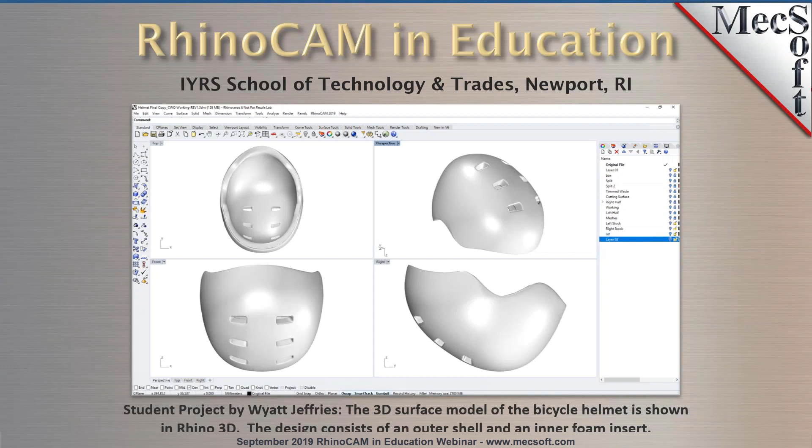So let me ask you, what was his reaction to RhinoCAM while making this project? The students are always blown away by what they can do with RhinoCAM. We start with RhinoCAD, so they actually have to design everything on their own. Then they go into RhinoCAM and I work with them one-on-one. The fact that they can take—this mold in particular was a split mold—just that concept alone is amazing. But being able to have RhinoCAM put in parting lines and indexing points for them, simple things like that are huge for our students.

Cool, tell us about this project—I think this one's pretty cool. This is actually one of my favorite projects. This was when I had first started taking over the RhinoCAM section of our course. This is a student's, we call it a suicide knob, for his steering wheel. Actually, we pushed this student to patent his idea because it was so unique.

This was actually a challenge, getting the correct radius in on a 3-axis machine, plus getting all these minute details because it was very thin. And the part was made out of carbon fiber as well. So we primarily use RhinoCAM to make all of our plugs and molds once they get to a certain point.

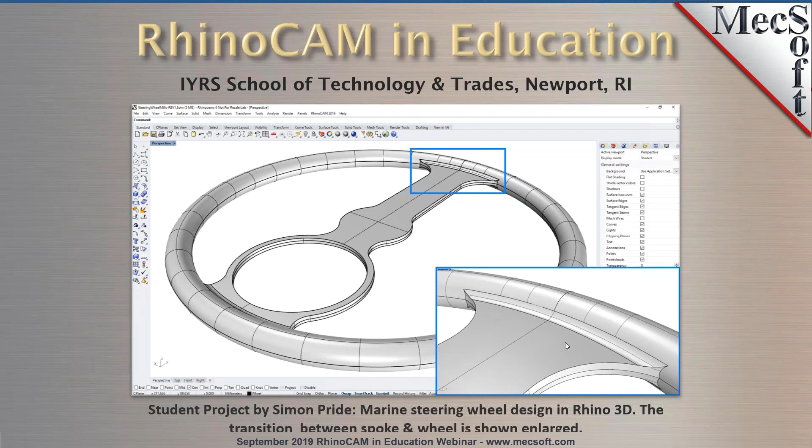We're highlighting the intersection there between the spoke and the wheel, the filleting, and how the parting lines had to work out there. Yeah, a lot of detail went into that.

We have 4 programs here, and one of them is a boat building and restoration program. It's a program where you learn how to build a boat and then learn how to restore a boat. A lot of our students are fortunate enough to get jobs at the Mystic Seaport. This particular group had worked on the Mayflower too.

We also have another restoration program project going on campus, which is the Coronet, another huge historical boat. The whole entire crew as of right now are all former IYRS students.

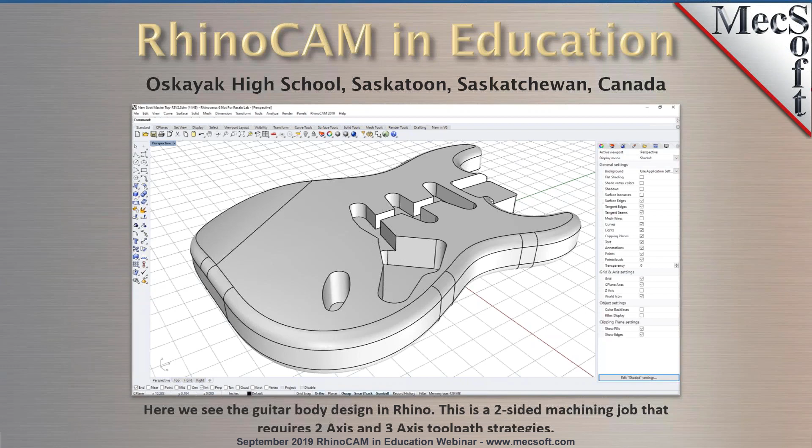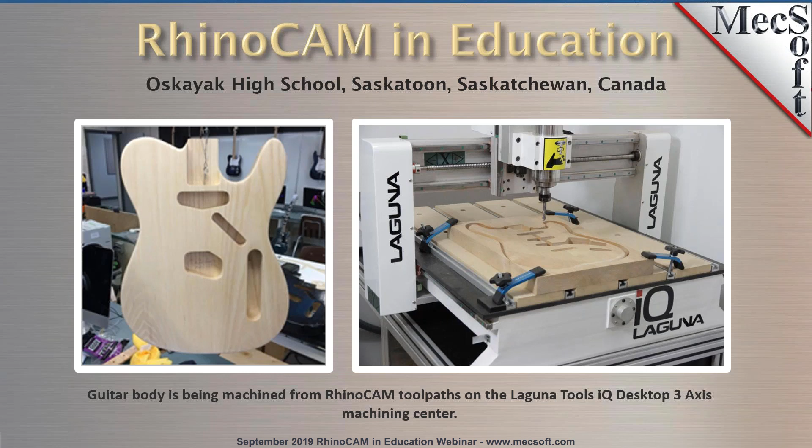Now what we're going to do is show you the RhinoCAM projects associated with these actual student projects. We're going to show you the RhinoCAM files, so let's go ahead and do that right now.

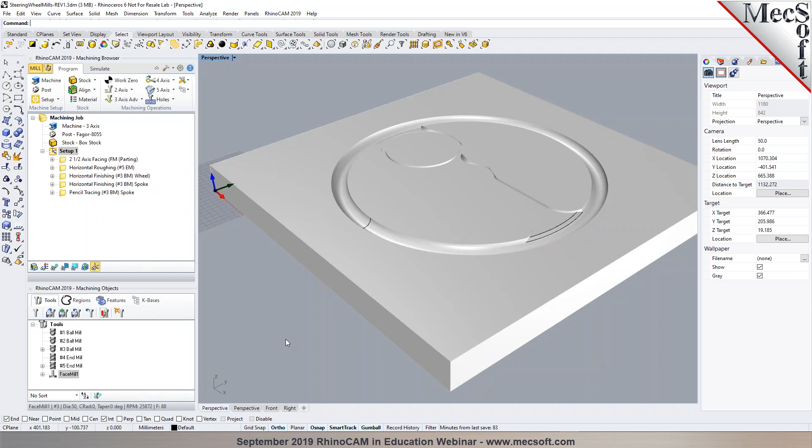This file is Simon's steering wheel composite mold. We're just showing one half of the mold, and we're going to show you a little bit of what the toolpaths were used to create this mold. In setup one, we have one half of the mold. Let's show the toolpaths real quick here.

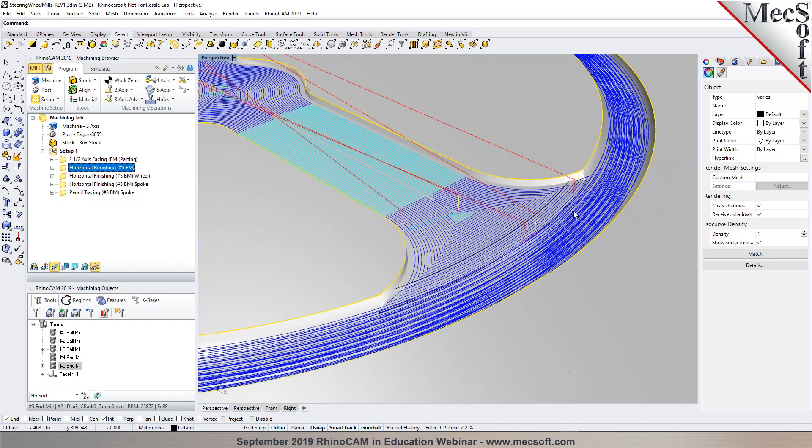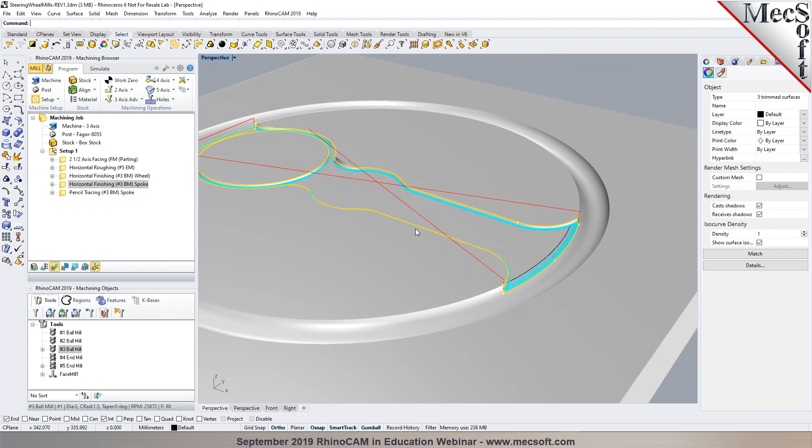We have a facing toolpath to face down the top of the mold. We have our roughing operation, which clears out the steering wheel itself and also the spoke area. We have one of our finishing operations to clear out the actual steering wheel, and another finishing operation to clean up the area where it meets the steering wheel and these sections of the spoke area. Then we finish up with a pencil tracing operation.

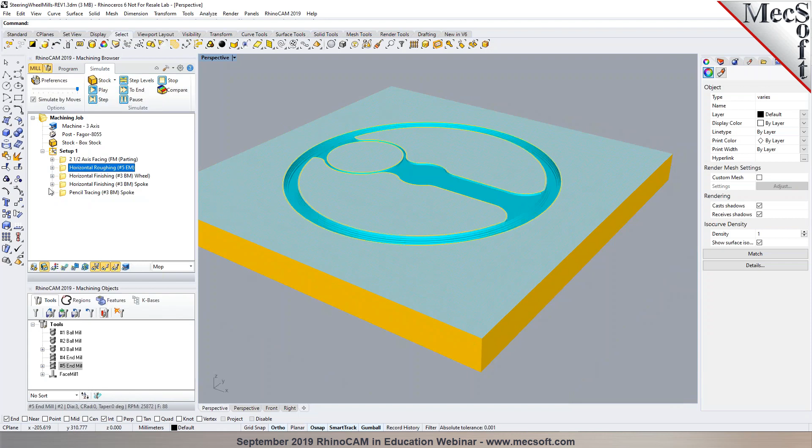Let's show some cut material simulations real quick of these. We won't run the simulations, we'll just show you what they look like and step through them. So we've got our facing - we'll turn the toolpaths off - then our roughing, our first finishing operation, our second finishing operation, and then our pencil tracing. Okay, let's go over to our next project from Wyatt Jeffrey.

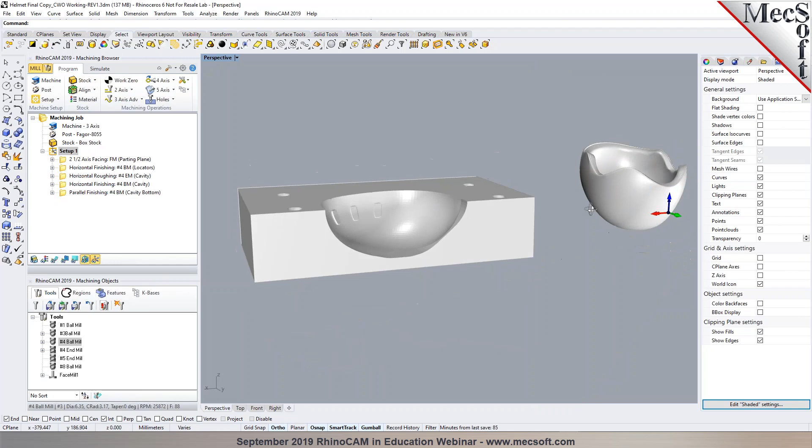As you can see here, this is the bicycle helmet that Wyatt used initially to create these layup molds. We're just showing one half of the mold, so it's basically mirrored on both sides - there are two mirrored halves of this mold.

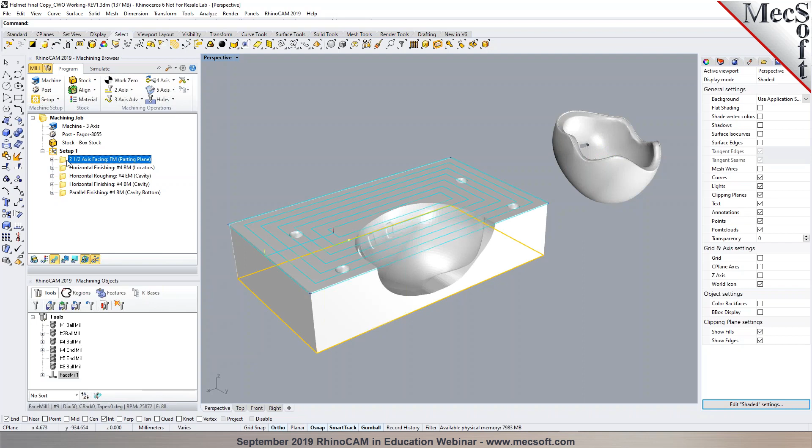We'll go through the toolpaths and then show the material simulations like we did on the other project. We start with the facing, then we have our four locator pins, then our roughing operation, also a horizontal finishing operation and a parallel finishing.

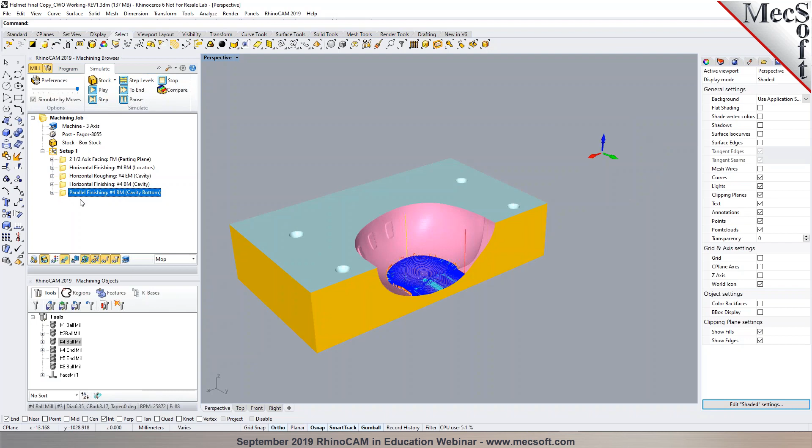Let's go ahead and show the cut material simulation of those real quick. So we start with our mold half, turn the toolpaths off so you can see them better. We've got our facing, our locator pins, our roughing operation, and then our finishing.

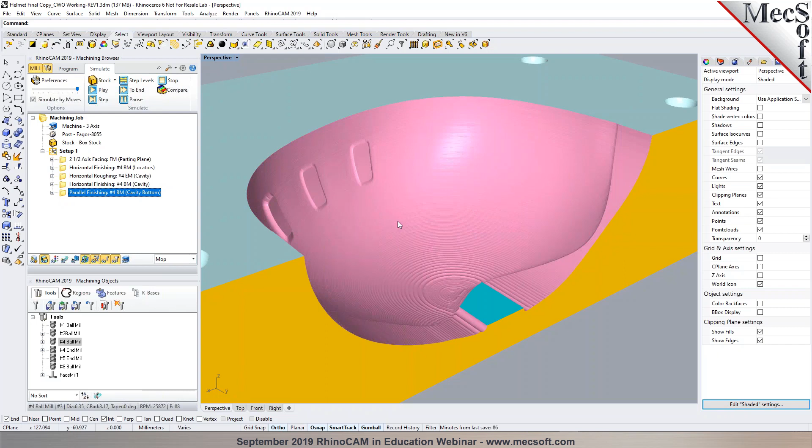Let the screen get updated here. And then our parallel finishing to clean up the bottom half of that mold. So that's basically the operations for Wyatt's project.

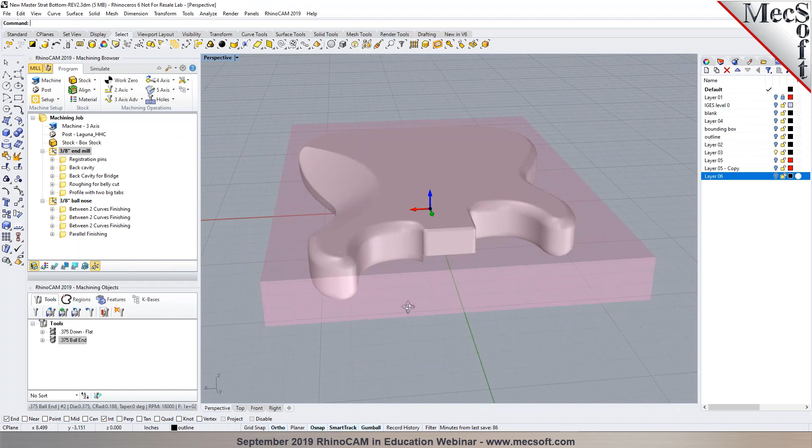Let's go over to Anthony's guitar project. We're going to show you first the bottom half of the guitar mold. This is a flip two-sided machining job, so they have locator pins and they machine one side and then flip it over and machine the other side. Let's take a look at the toolpaths here.

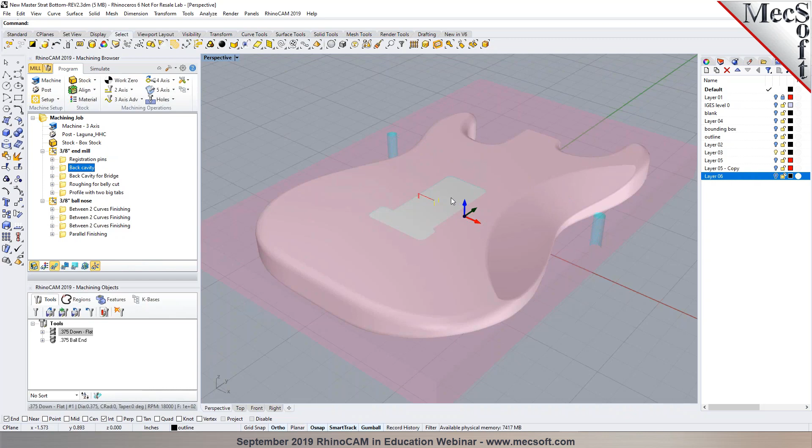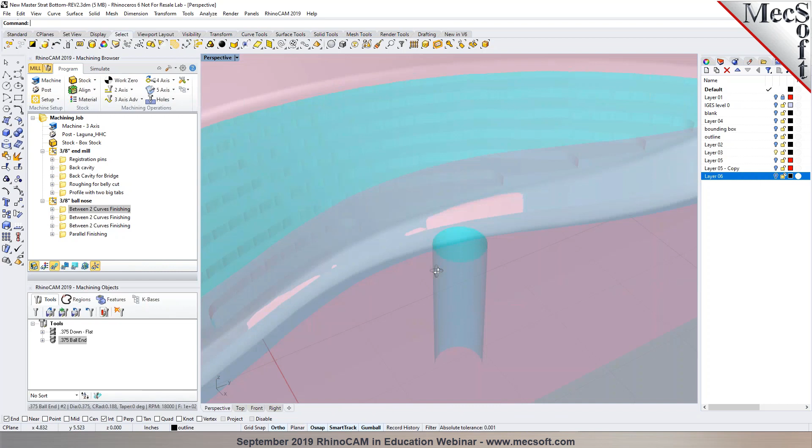We've got our registration pins, our cavities - the two-axis cavities, you don't see it because the part is covering it up right now, and we'll show that in the simulation in a moment. Then our roughing for the belly area, and our profiling operation for this half of the mold. For the finishing operations, they've got some between-two-curves machining operations going around these fillets, also between two curves on this front area, and between two curves on this back area to do the finishing, plus some parallel finishing on the belly section.

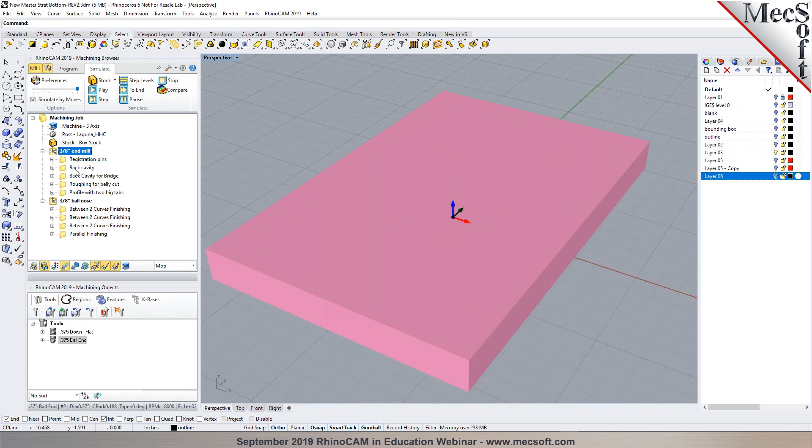Let's go ahead and show that real quick in the simulation section. We'll start off with our roughing operations - there's our registration pins, we'll turn the paths off so you can see that better. There's our pocketing cavities and also our roughing areas for the belly section, and then our profiling for this half of the outer profile.

And then our machining - we've got our between-two-curves machining here.

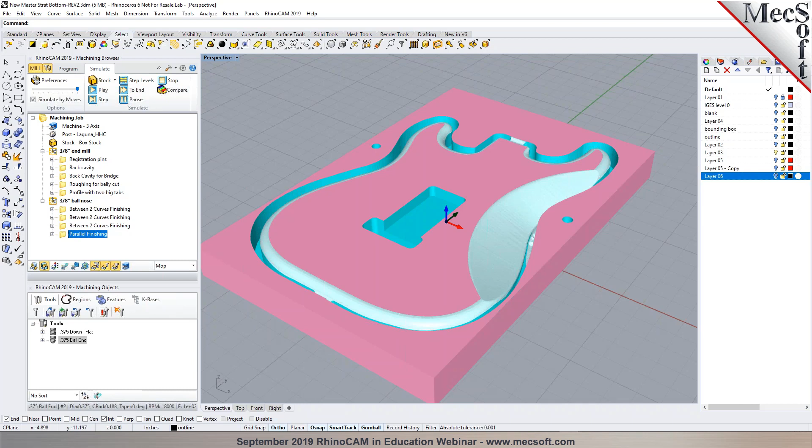We've got our second two-curve machining up front here, our third at the back, and then our parallel finishing for the belly section.

So let's go ahead and show you the other half and see how this gets finished up on the CNC machine. After that half is done, it's taken off and flipped over and aligned with the alignment pins. This half of the mold is picked up, starting with the pocketing area for the cavities on this side and the profiling on the outside.

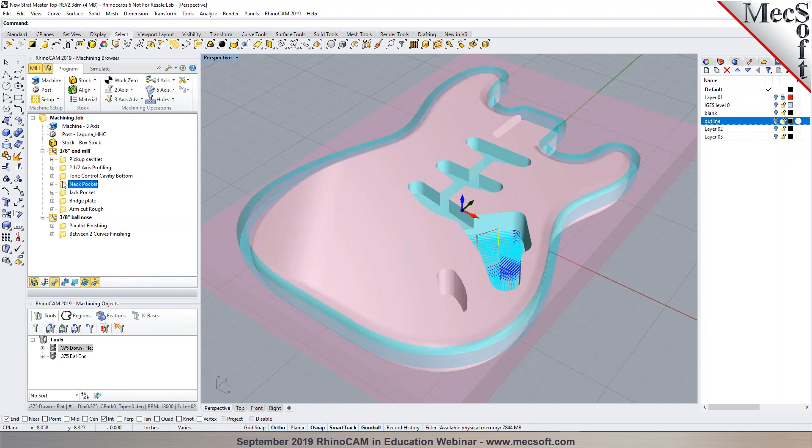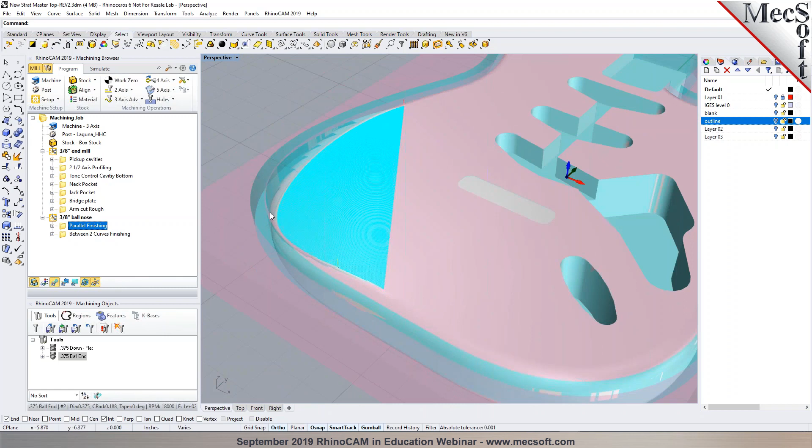And then also some more pocketing on the bridge, and we're going to do some roughing here on this arm cutout section. Then for the finishing, similar to the back, we have the parallel finishing for the arm section and between-two-curve finishing for the outer profile.

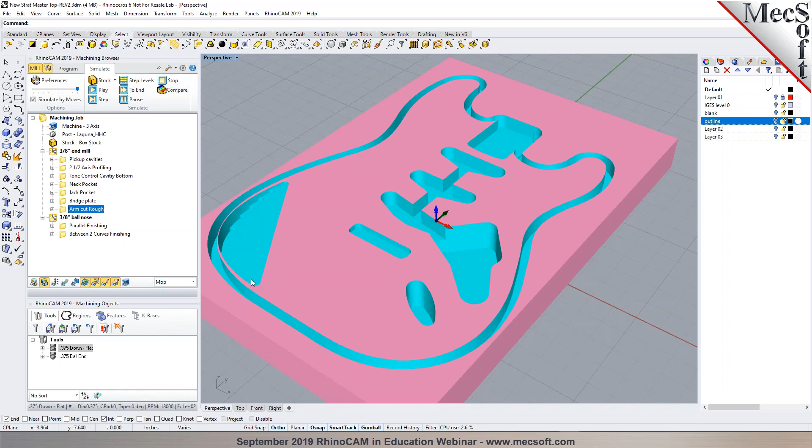So let's show those cut material simulations real quick. We've got our pocketing, our profiling, the rest of our pocketing, and our cutout for the arm section for roughing. These are all roughing operations. The pocketing are actually finished pocketing operations as well. And we've got our parallel finishing and our between-two-curves finishing.

So this finishes, and at this time the guitar is still connected to the stock. If you recall on the other bottom half, we had two tabs that were not cut, so that keeps it connected with the stock itself.